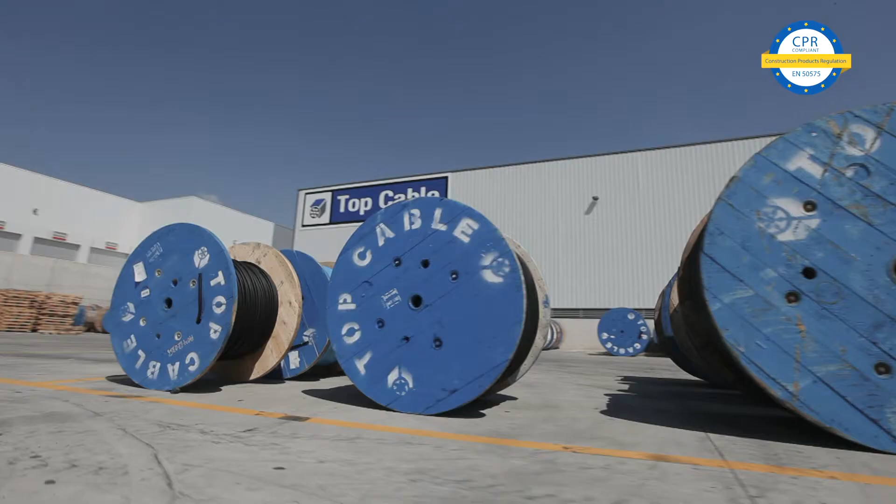Top Cable is an internationally recognized manufacturer of electric cables. Our company is committed to providing electric cables that in the event of a fire ensure the highest level of safety and reliability for people and equipment.

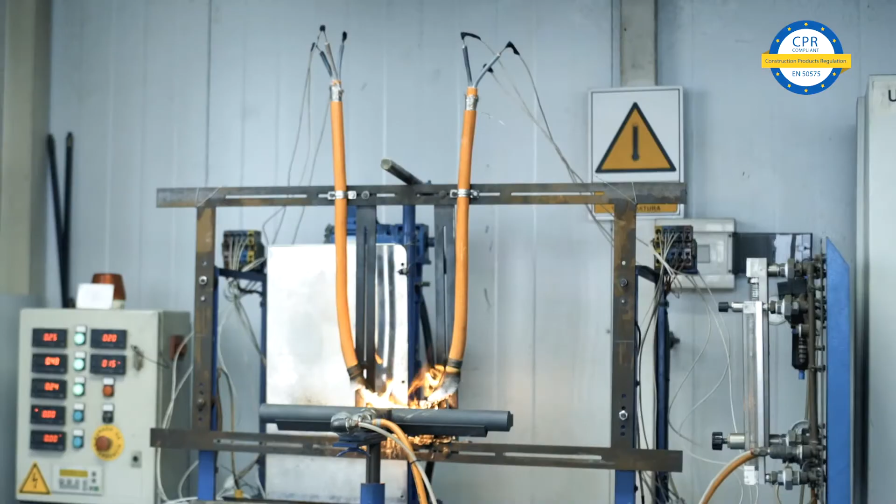The Construction Products Regulation is a regulation issued by the European Union, in force since the 1st of July 2017, and which must be followed by all member states. It is a fact that 90% of all fires that break out in Europe every year occur in buildings.

The new CPR regulation forces cable manufacturers, cable distributors, project managers, architects, constructors, and installers throughout Europe to provide buildings with cables that have the right CPR classification. The CPR includes 4 classes that apply directly to electric cables: B2, C, D, and E.

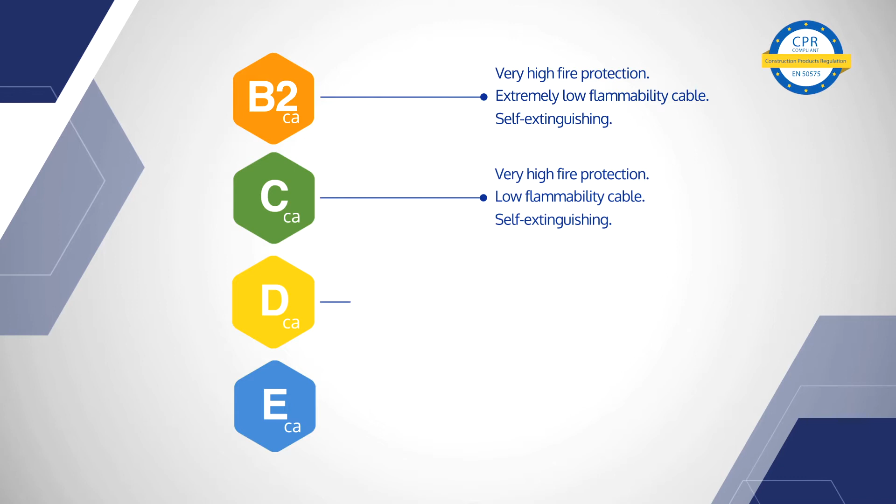B2 cables have the highest performance against fire, very low flammability, low fire propagation, and are self-extinguishing, providing maximum protection for people and equipment. C cables also have a high protection against fire, a low flammability, low fire propagation, and are self-extinguishing as well. D are cables with a moderate protection against fire, moderate flammability, and limited smoke emissions. E are easily flammable cables.

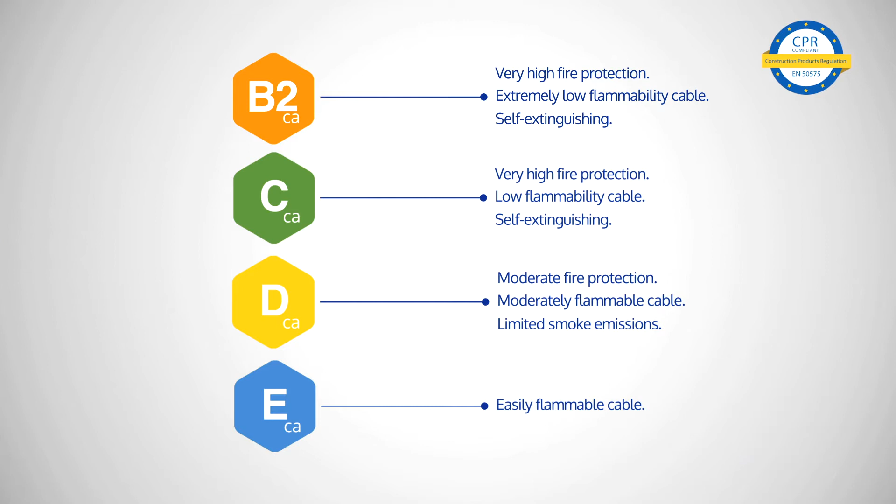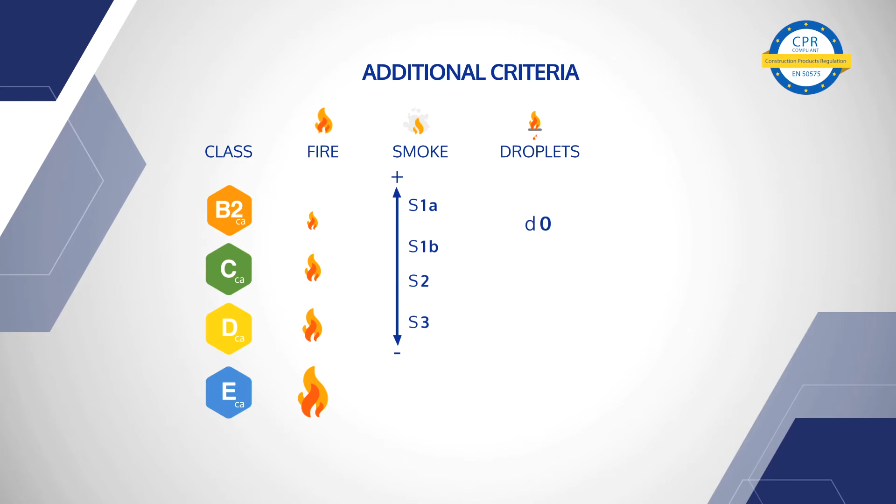Furthermore, the CPR establishes 3 additional classification levels: the amount of smoke produced, the flaming droplets that fall from the cable during combustion, and the level of acidity of the smoke produced while burning. These additional classifications are vital when it comes to safety in the event of a fire.

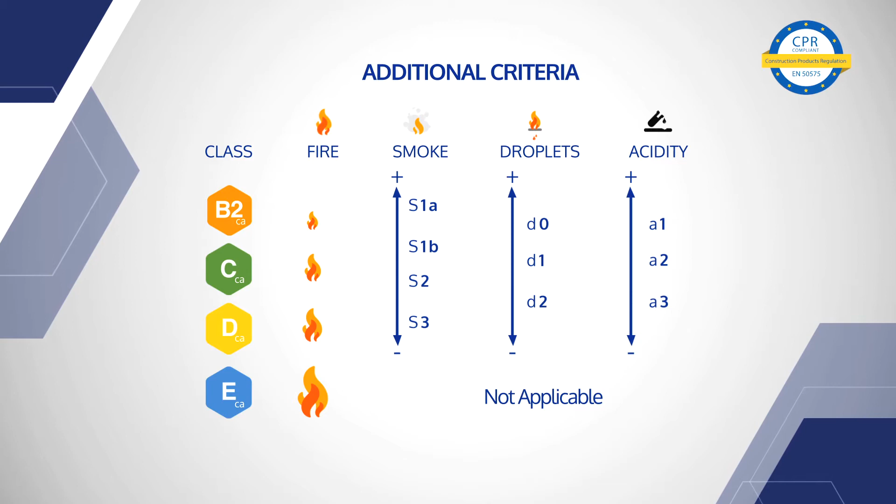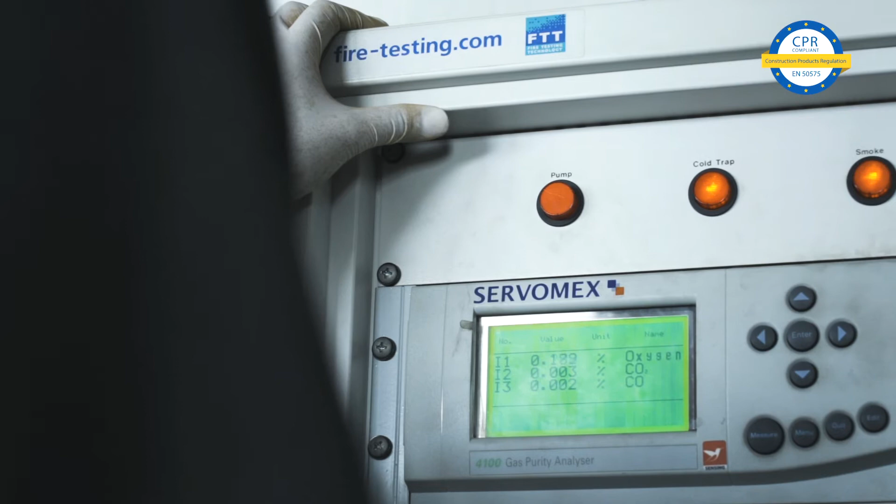The CPR provides common and severe fire tests to be carried out by cable manufacturers in official laboratories. The official results of these tests will state the fire performing classes: B2, C, D, or E. During fire tests, heat release and flame propagation are being measured on a constant basis.

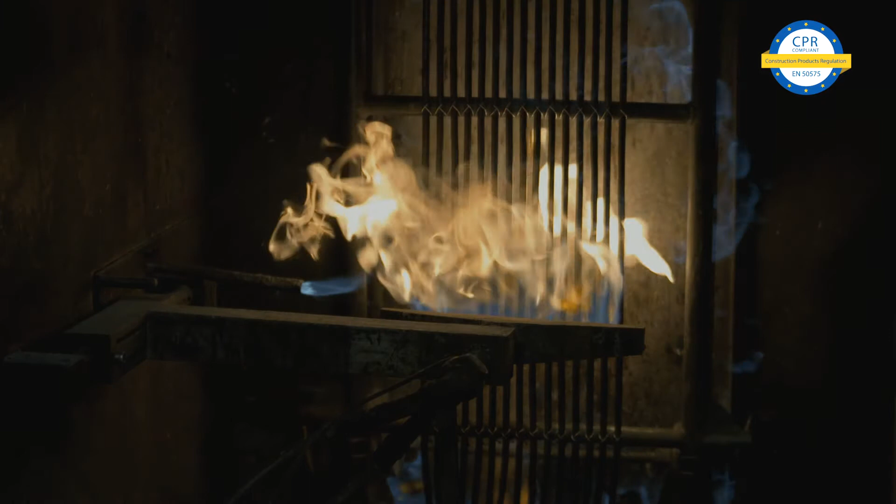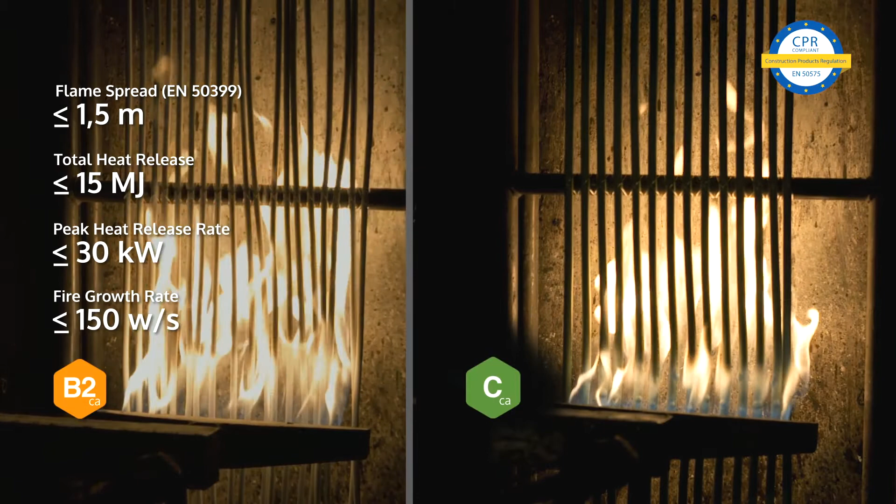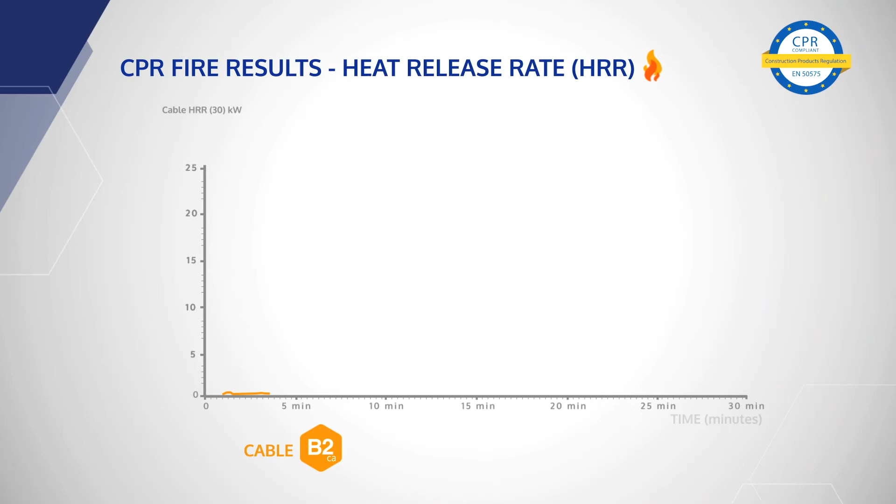Cables B2 shall not propagate the flame spread more than 1.5 meters, and cable C shall not propagate it more than 2 meters, whereas cables with E classification spread the flame unlimitedly. Installing B2 or C cables prevents a localized fire from extending to other areas through the cable network.

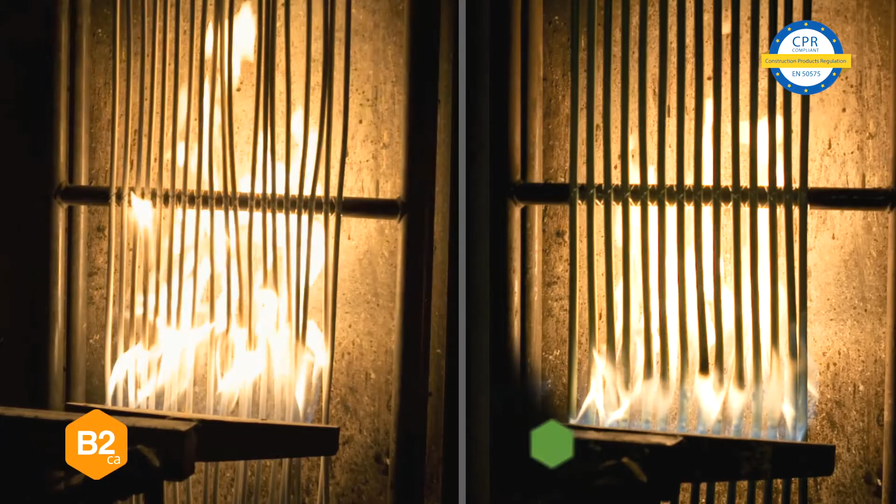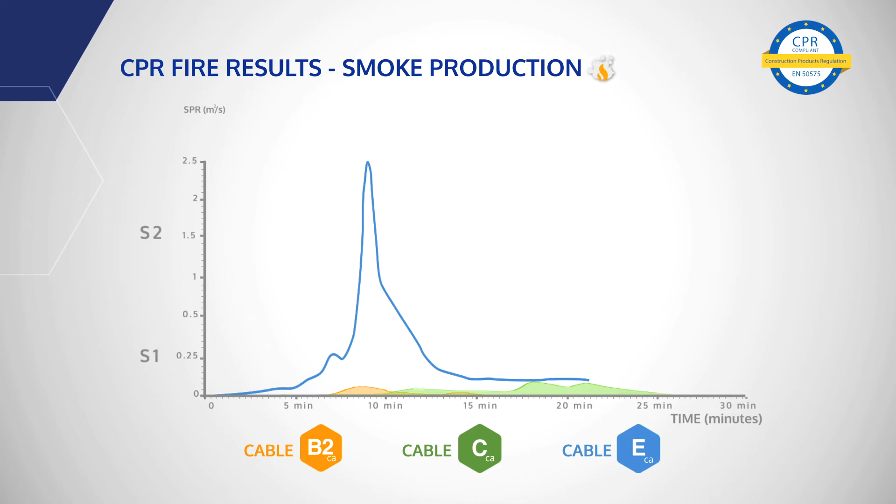Regarding smoke production, cables B2 and C have a light transmittance greater than 60%, indicated by the following classification: S1, S1A, S1B, S2 or S3. This enables people to locate the normal exits or the emergency exits very quickly in case of fire. The CPR does not test the smoke production on Class E cables.

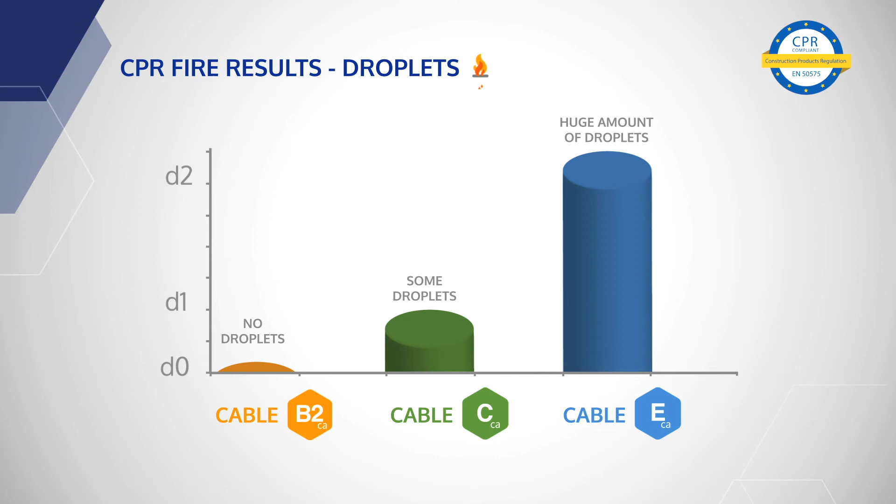Again, B2 and C cables have D0 or D1 index, meaning that the flaming droplets self-extinguish after reaching the floor. This is a very important feature in order to avoid the generation of fire fronts that can spread the fire quickly. The CPR does not test the flaming droplets on Class E cables.

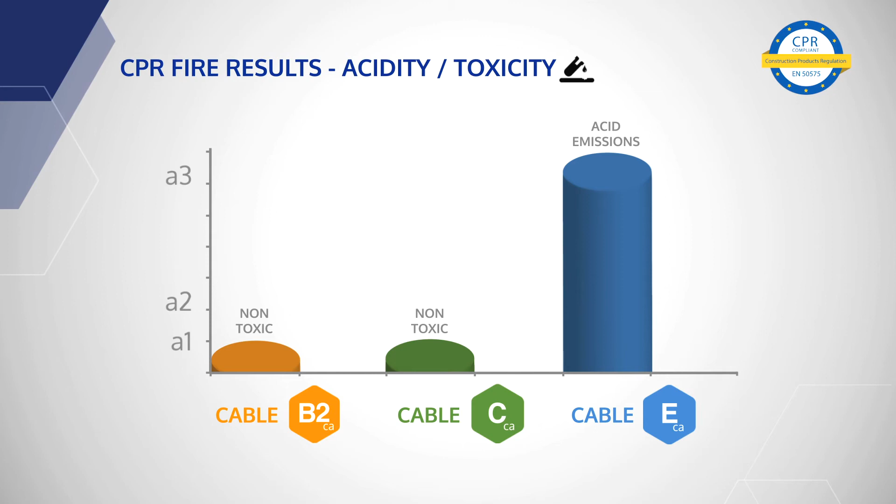The CPR also measures the acidity or toxicity of the gases that come out of the cable when burning. Cable B2 and C are not toxic. This is a very important issue, since people mostly die during fires because they cannot breathe due to the poisonous gases released from non-halogen-free burning compounds. The CPR does not test the acidity on Class E cables.

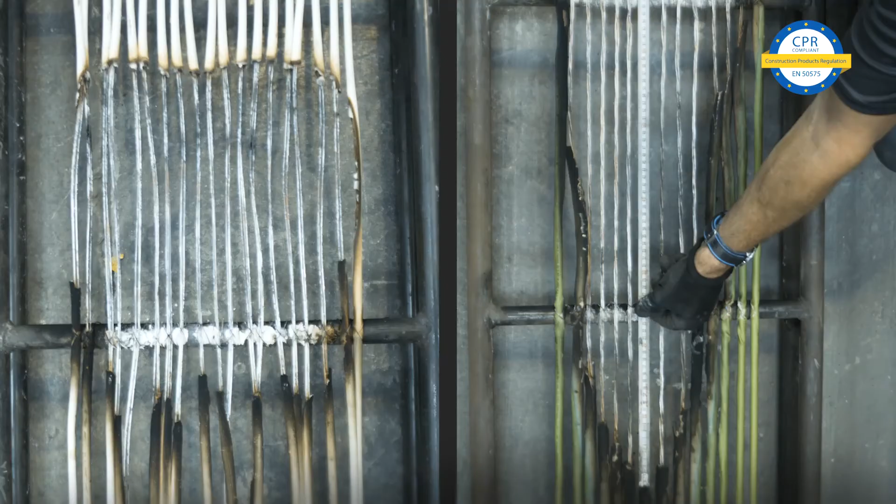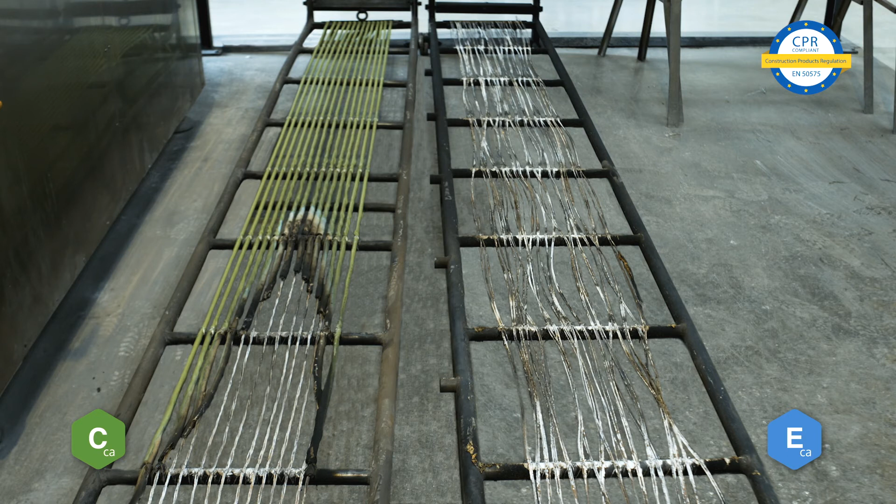National regulations prescribe specific classes based on environment and installation rules. In most countries throughout Europe, Class Cca is required in locations with high people density and important equipment such as offices, schools, hotels, hospitals, data centers and such like.

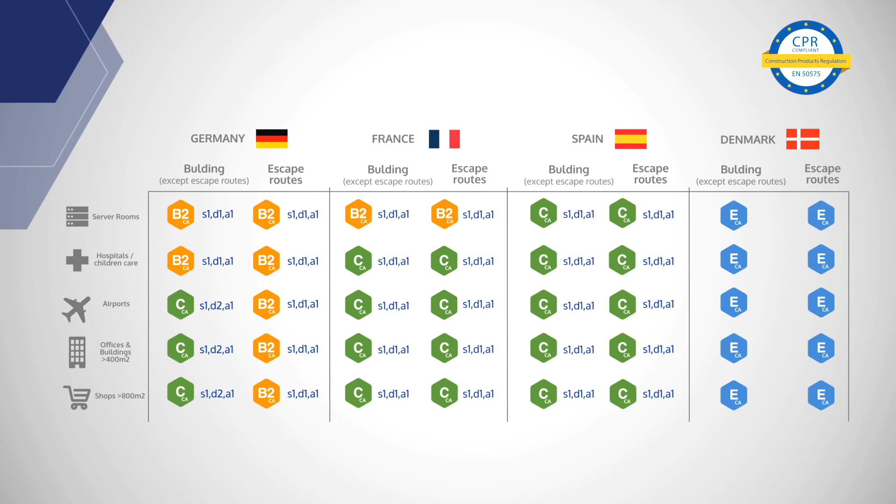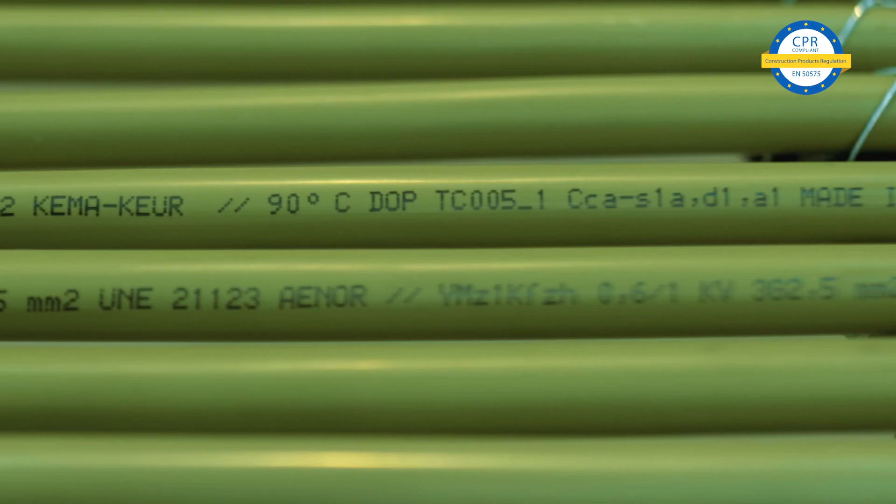Top Cable can provide a whole range of cables for all purposes with the best CPR performance. For example, our Toxfree RZ1K cables are classified as Cca, s1a, d1, a1. This means that this cable is Class C. Therefore, it has a high fire protection, a moderate flammability, and is self-extinguishing.

Additionally, it has been tested with the following results. S1a, no smoke emission. D1, small number of droplets which self-extinguish in under 10 seconds. A1, non-acid emission.